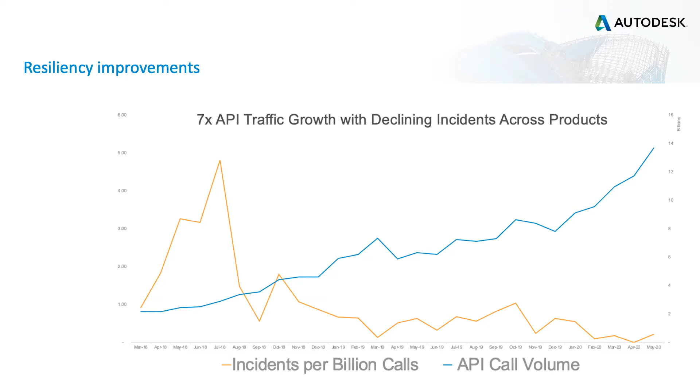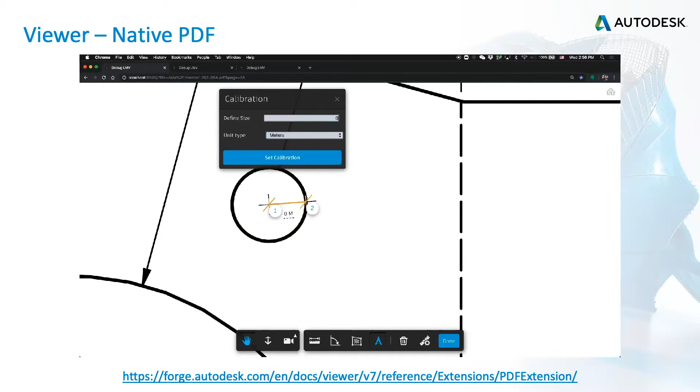Now we will talk about the feature enhancements during the last few months. The first one I'm going to talk about is the viewer. I'm going to first talk about supporting native PDF by the Forge Viewer.

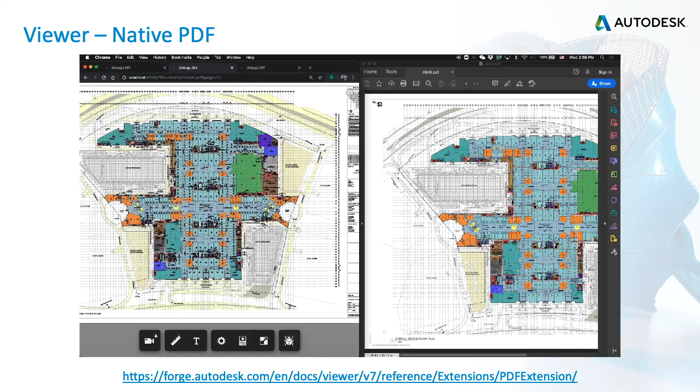You can see that now we support native PDF files with the PDF extension, and the performance is very good. Comparing to some other PDF engines, you can zoom in and zoom out pretty quickly, and it's all about vector, not pixel.

So you can zoom in, zoom out, and it's not the leaflet as we used to have. You can also navigate between different files with navigation.

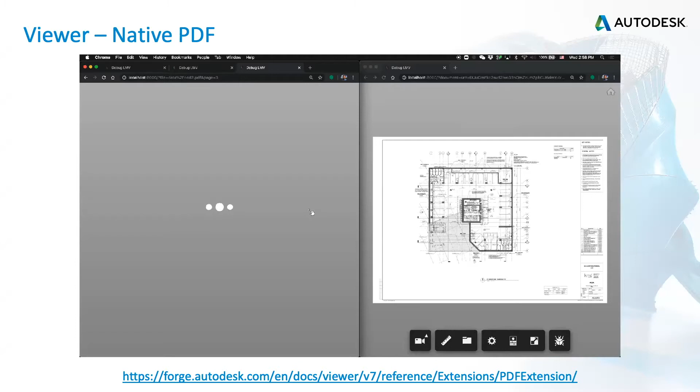The next enhancement of Forge Viewer is GLTF file support. I think many of you know the GLTF file format. It's very popular in the 3D area. It's something like a JPEG in the 3D area. Now with the extension, you can load the native GLTF file into Forge Viewer.

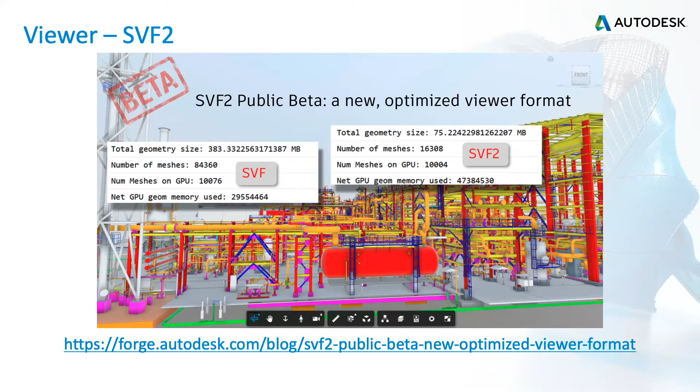The very important enhancement last year is about SVF2. It's currently in public beta, and it's a new optimized viewer format. You may ask, what is SVF2? If you've heard about OTG, yes, that's almost the same. OTG is the previous code name, and now we rename it to SVF2 publicly.

SVF2 is much more optimized, based on the SVF format. If your model contains a lot of repetitive geometry shapes, the performance will be much better, and it will improve loading times. It supports incremental loading, and also supports faster switching among multiple versions.

Because SVF2 is processed after SVF, normally the translation time is a little longer than the previous translation.

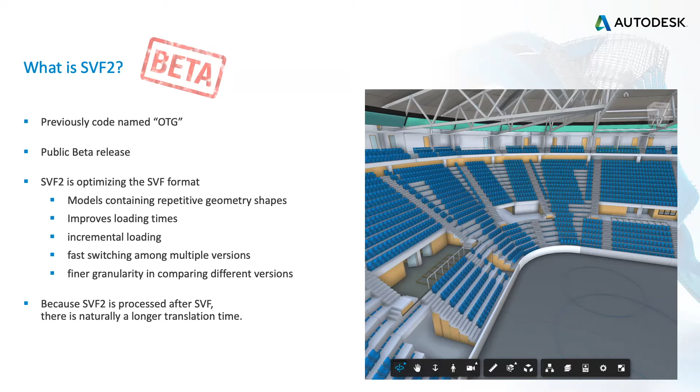So how do you use SVF2? How do you work with SVF2? For example, you need to do the translation. You need to change your code a little bit to generate the SVF2 file format. When you post the translation job, you just need to change the type to SVF2, and that's it.

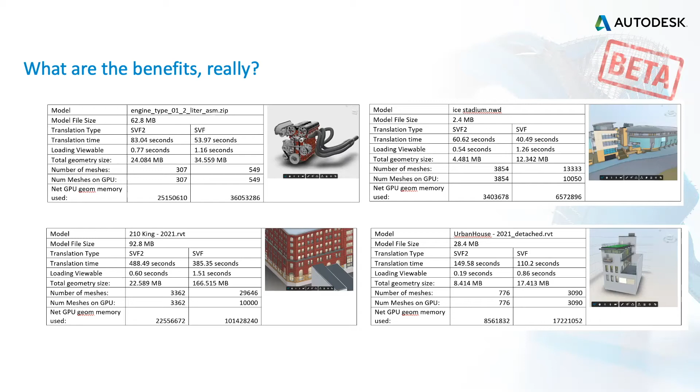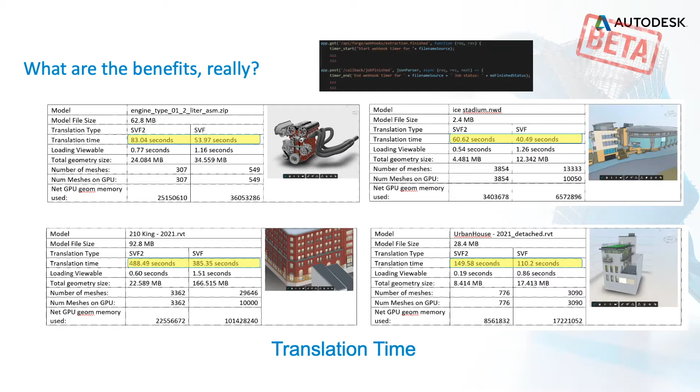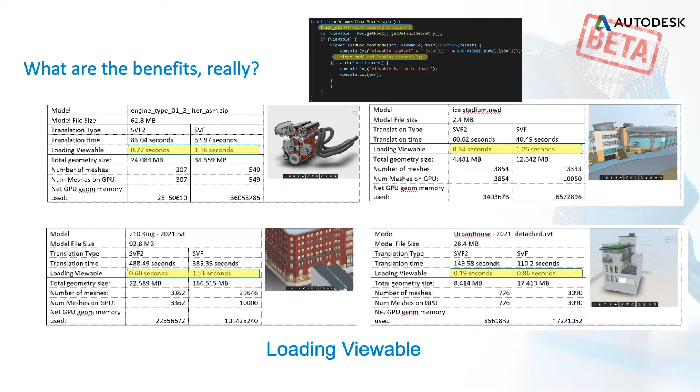Now, after the file is translated, you will see the real benefit of SVF2. Here is the benchmark for some typical 3D models. You can see that the translation time is a little longer compared to SVF, but the loading time will be reduced, and it will be very quick, and the geometry will also be reduced dramatically.

It depends on the different 3D model. For some models, you can see the mesh will be reduced dramatically, because there are a lot of repetitive meshes.

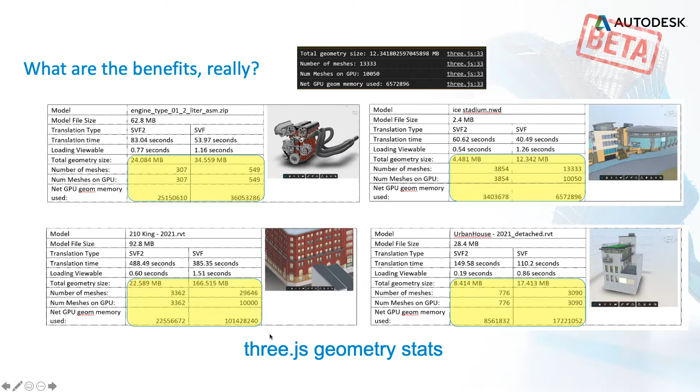Okay, next we are going to talk about data visualization. This is a very interesting extension. If you are trying to build a digital twin, this should be what you want. And this is a React-based reference application.

It supports data adapters to IoT hubs, including Azure and AWS. It also supports IoT visualization, including dot sensors and heat map to show the different data, and it also supports the timeline.

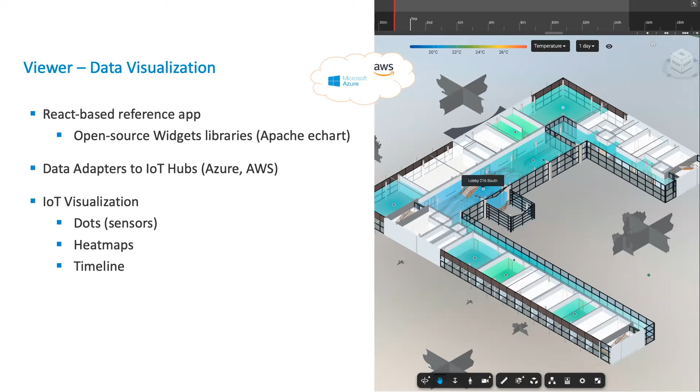You can see the data within the timeline for history data or real-time data. Let's look at this short video. This is a typical application for data visualization. You can see your model is loaded, and you can see all the different sensors.

All the sensors are connected to the IoT hub, and you can see the data from the timeline. You can see the list of the sensors. Now you can also select a different viewer to see the sensors.

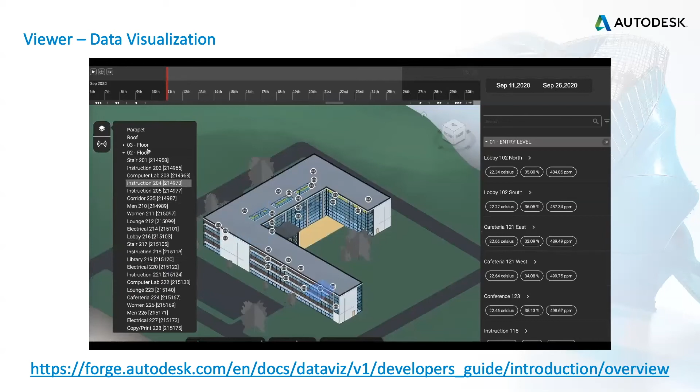And the nice thing is that if it's a building, you can just get the different floor. For example, you can just see the second floor, and you can see the different colors. This is a heat map, and the different colors represent different data.

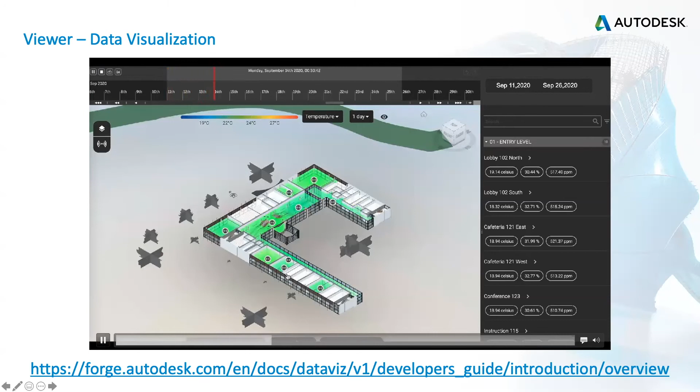You can navigate from the timeline to see the data change. Here this is the timeline chart. You can check the history data.

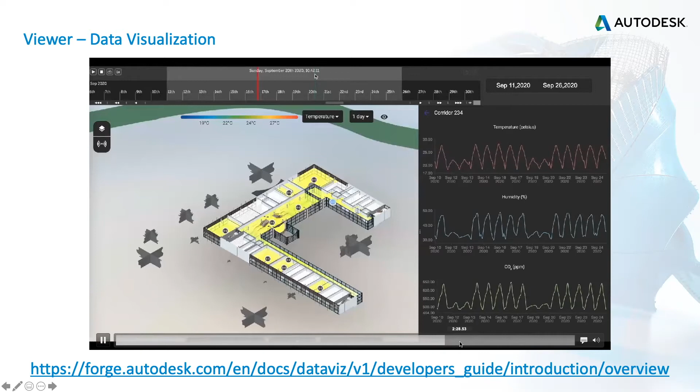If you are interested in how to add some sensors by yourself, you can do that. For example, here we have two sensors. If I want to add one more sensor, we just go to the code and add. You can see here we can add the device, one more device.

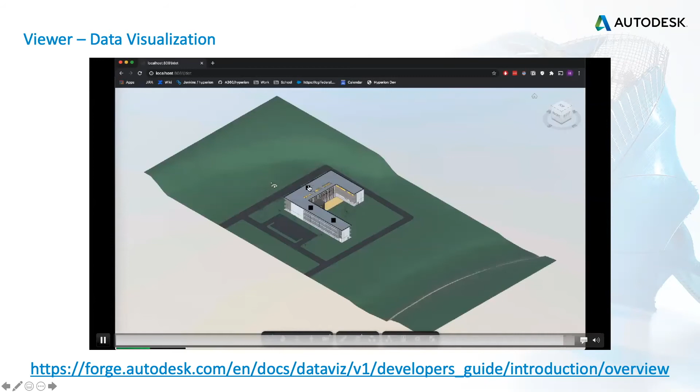We can set the position. We can add one more device, change the type, and add the position. After refresh, you can see the new sensor. The new sensor will be listed here.

So we have a lot more enhancements. If you are interested, you can go to the change log to check more, including support for native DWF files, box selection, and things like that.

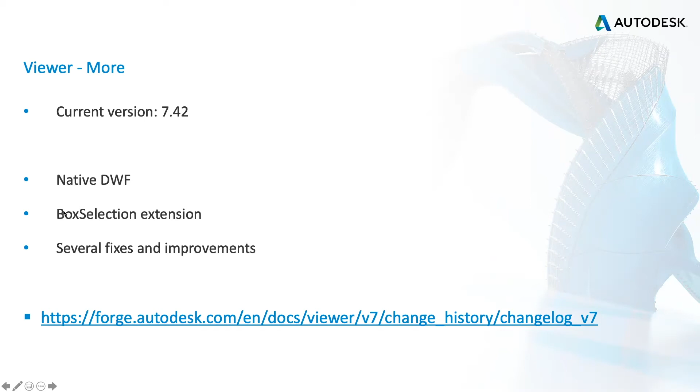Okay, the next service I'm going to talk about is data management. The first one is the OSS region in the header. This is required now. You can specify the different region, including US or Europe, where you want to port your file, your storage.

And the next data management service is upload and download of files. Now you can directly upload or download from AWS S3.

For the model derivative service, first the get metadata and get property operations have been significantly optimized. And as we mentioned before, because we now support SVF2, the model derivative service is also improved to support SVF2. You just need to use the new SVF type.

We also support custom attribute webhooks for the translation job.

The next model derivative feature is IFC translation. We changed the translation method to the conversion method, and by default, the IFC translation still uses Navisworks.

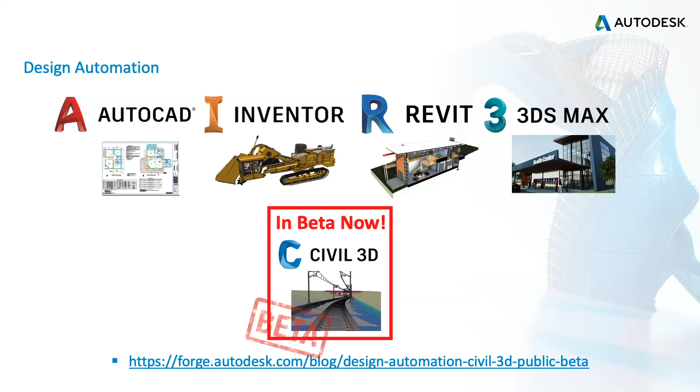Another enhancement is that the Revit core engine is now available on design automation for Inventor. So if you want to generate a Revit family from Inventor, you can just do it within the Inventor design automation engine. You don't need to do it in the Revit engine now.

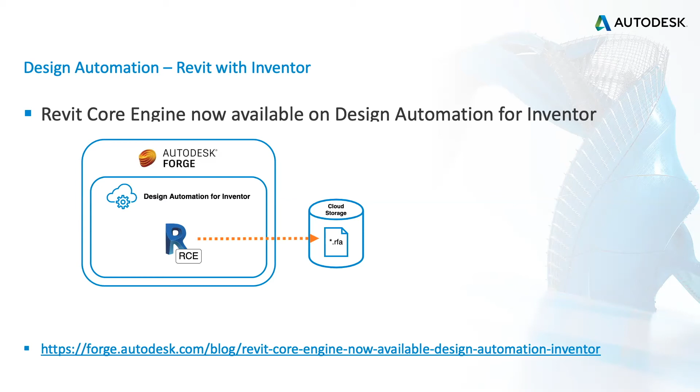I know many of you are from the AEC industry, and me too, right? Now let's talk about the BIM 360 API updates. That should be something interesting and important for you.

Now, the first API set is the Assets API. You can now access asset items, which includes custom attributes and also settings in the project admin, for example custom attribute categories and status sets.

If you are interested in some details, you can check about the blog. There, we are talking about the capability of this Assets API.

You can also check the documentation, including field guide, and we also have step-by-step tutorials to help you go through the typical workflow. The reference guide has a lot of details for each API.

And if you want to play with these endpoints, we provided the Postman collection, so you can easily play with that.

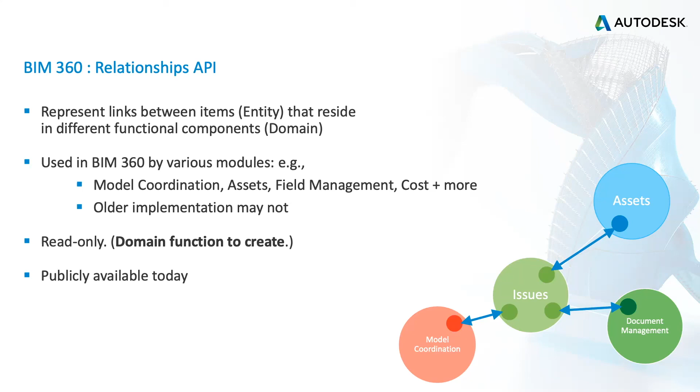But currently it's read only, so you will need to use domain functions to create it. There's no method to create the relationship directly now. The API is available now, so you can go check it. Here is the documentation for the relationship API.

Okay, last but not least is Autodesk Construction Cloud. This is a new product, and because Autodesk Construction Cloud is also built on Forge, it uses the same services as data management, model derivative, and viewer.

They are the same, but it's also compatible with BIM 360 API, but not all of it. So you need to check the compatibility table to see what's compatible with the BIM 360 API.

Data at the center. This is not a feature that has been completed, but this is a long-term vision which is very important: moving from a file-based CAD world to a data-centric world.

We won't talk much today, but just point you to what Autodesk is working on, making access to data a web service. So you don't have to worry about or care about where the data is, whether in a file or in a database. You just need one way to get the data, and in time, edit that data too.